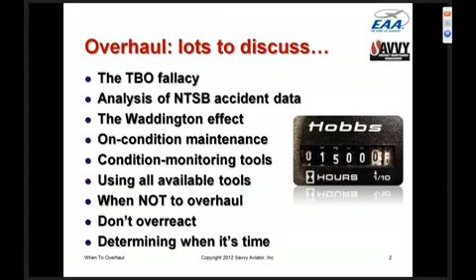Let me start off talking about the concept of TBO. As far as I'm concerned, and I'll explain why I feel this way, the whole notion of engine TBOs is a thoroughly discredited concept, one that has cost aircraft owners hundreds of millions of dollars over the years by causing perfectly healthy engines to be euthanized arbitrarily at some specific number of hours or years. I say this because all of the data suggests it's a bad idea.

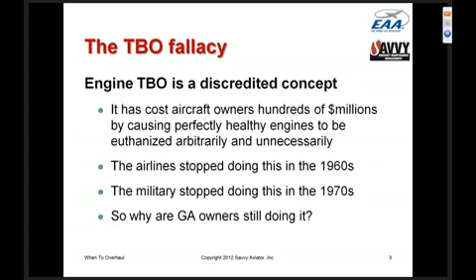The airlines stopped overhauling engines at TBO in the 1960s. The military stopped doing it in the 1970s. Pretty much the only segment of aviation that still does this is at the low end of the food chain where most of us hang out - owner-flown piston GA. And in my opinion, we shouldn't be doing it either. That's one of the reasons I do these webinars and write articles - I'd like to drag piston GA maintenance kicking and screaming into the 21st century. For the most part, presently it's sitting at about 1950. So we're going to try to do something about that.

Let me tell you why I think overhauling at TBO makes no sense. TBOs, as presently published by engine manufacturers like Continental and Lycoming, are based on time in service - in terms of engine hours and also calendar years. The problem is, time in service is not what determines engine longevity. It has very little to do with it.

I have about an hour and 15-minute presentation that I give at AirVenture, called 'To TBO and Beyond.' It goes into a lot of detail about exactly what determines how long our engines last. There are a number of factors, but it turns out hours and years are not among them.

The primary factors that limit the life of a piston aircraft engine are really two. The first one is corrosion. The primary reason aircraft engines don't make it to TBO is not because they wear out - we never wear these engines out. It's because they rust out.

They rust out because a lot of owner-flown aircraft are used irregularly and spend a lot of time sitting. If they sit in a high corrosive environment - like where my airplane is based in Santa Maria, 8 miles from the Pacific Ocean - and the protective oil film gets a chance to strip off critical ferrous metal parts like cams, those things will start to rust. We lose a lot of engines that way. That's probably the primary life-limiting factor in piston general aviation engines.

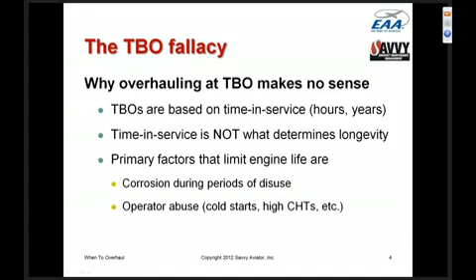The second thing that limits engine life is various forms of operator abuse, things like cold starts without a proper preheat, failing to observe proper cylinder head temperature limits—I've gone into that in great detail in the leaning webinar I did not too long ago—and so on. But those are the things that primarily determine the useful life of our engines, not some arbitrary number of hours or years.

One of the big problems with manufacturers' specified TBOs is that they're one-size-fits-all numbers. Does it make any sense to use the same TBO for an airplane tied down outdoors in Tampa, Florida, probably the highest corrosion risk environment in the US, as one hangared in Tucson, Arizona, where engines can sit for decades without corroding? That's why they put the boneyards there. Does it make sense to use the same TBO for an airplane that flies 400 hours a year on long trips as one that flies 40 hours a year, mostly VFR weekend days for $100 hamburgers? It doesn't make any sense.

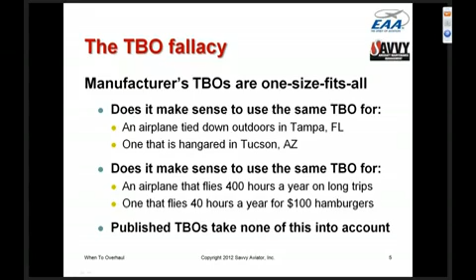The way the airplane is used and the risks to which it's exposed, both operational and environmental, have a gigantic impact on the useful life of the engine. And yet published TBOs take none of that into account.

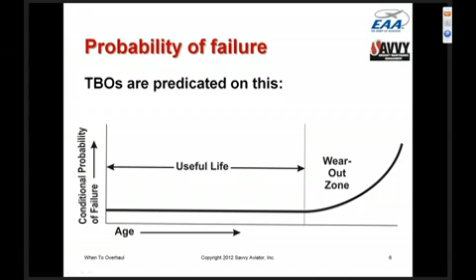So the question is, what does the shape of this curve actually look like on the left side and on the right side? Because if the engine reaches a certain age and you're concerned it may be approaching the wear-out zone, and you decide to overhaul it to avoid that, what you're doing is putting yourself right back into the infant mortality zone where the risk is high. So which is the worst threat—the left side of the curve, where infant mortality risk is high, or the right side, where wear-out risk is high?

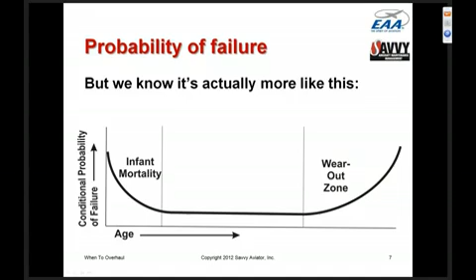Let me tell you the best data we do have. It comes from a study done in 2007 by a friend of mine named Nathan Ulrich. He's a PhD reliability engineer who has a passing interest in this stuff because he's also a Bonanza owner.

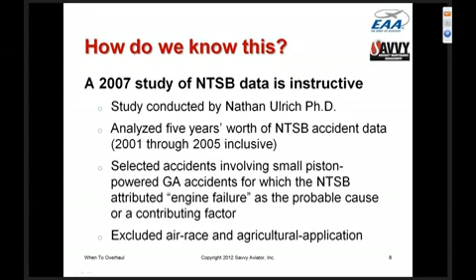Nathan, back in 2007, ran a very interesting study of NTSB accident data for a 5-year period from 2001 to 2005. He went through the NTSB database and selected all the accidents over that period involving small piston-powered general aviation airplanes where the NTSB attributed the accident to engine failure, either as the probable cause or a contributing factor. From that population, he excluded air race airplanes and agricultural application airplanes to try to get data that represents how most sane people operate their airplanes.

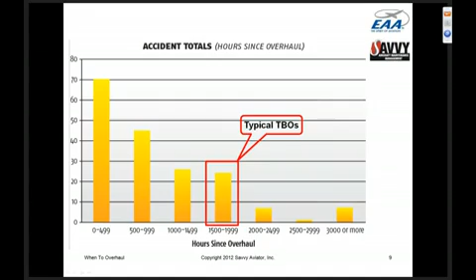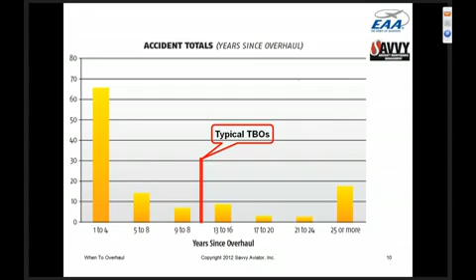So we have to be a little careful evaluating this data. We have to understand it can't tell us a whole lot about the shape of the right side of the risk curve, the wear-out zone, simply because engines are so frequently euthanized before they get there that we don't have a lot of data. This is what's called in the reliability-centered maintenance literature the Resnikoff conundrum, which basically says the data we really want is data we typically can't get, because the maintenance culture prohibits us from getting it—it doesn't allow people to operate out there.

On the other hand, this data tells us a great deal about the shape of the left side of the risk curve, the infant mortality side. I hope you find it eye-opening just how big that risk is. So if you've got an engine with some time on it and you're thinking about overhauling it, you ought to think really carefully about the fact that doing that is going to put you right into the zone where you're most likely to fall out of the sky.

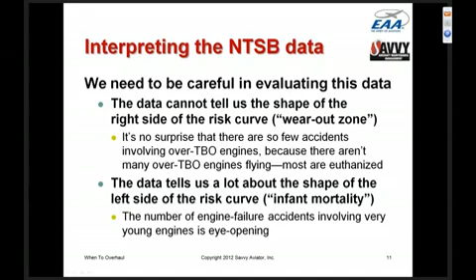Most people don't really think about that, but the data is very clear that if you're going to fall out of the sky with a catastrophic engine failure, the overwhelming likelihood is that it's going to happen with a low-time engine, not a high-time engine. What we can say with certainty is that the risk of catastrophic in-flight failure is very high when the engine is young and declines pretty rapidly as the engine gets older.

From the data that's available, and we wish we had more, there is no evidence that the wear-out zone begins anywhere near published TBOs. In fact, there's good evidence that the wear-out zone probably doesn't start until much more than published TBO, probably twice published TBO, for all but the highest risk engines. The highest risk engines are those exposed to corrosion or abuse, and those engines aren't particularly likely to even make it to TBO. But the average engine, given a chance, is very likely to go way beyond TBO without any problem whatsoever.

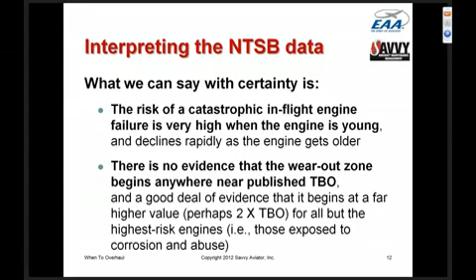It's interesting that this stuff is a special case of a general principle first documented in about 1941. I wrote an article in EAA Sport Aviation, I think it ran in 2010, called the Waddington Effect, that talked about some top secret research that went on during World War II, in which a scientist by the name of C.H. Waddington was pressed into service by the Royal Air Force.

He was brought in to start analysis on the maintenance of their B-24 Liberators that were supposed to be killing German subs. They had a fleet of these sub killers that were spending more than half their time in the shop, and they brought in scientists led by this guy Waddington to try to figure out why they were such hangar queens, why they were spending so much time in the shop, and why they weren't able to be out there killing German subs.

It was basically what we today would call a force readiness study. One of the things that Waddington's team did was gather tons of data and start crunching through it. They discovered that when they plotted the number of unscheduled maintenance problems with these airplanes as a function of how many hours it had been since the last scheduled maintenance, at that time they were putting these airplanes in the shop every 50 hours for scheduled preventive maintenance.

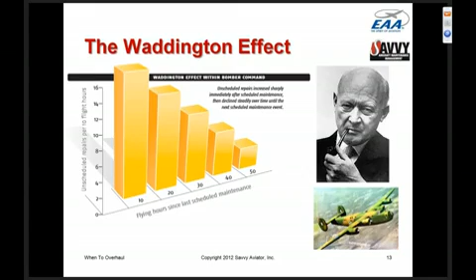In the early 60s, those principles were rediscovered at United Airlines. The United guys had no idea about the work done in the 40s because it was still classified. But they crunched a whole lot of data in the 60s, right when they were changing over from the big recips to the first jets, DC-8s in United's case, and concluded exactly the same thing: that the preventive maintenance being done to these airplanes was causing them to be unreliable. The less preventive maintenance they did, the more reliable the airplanes became.

As a result, this became the way maintenance was done in the entire air transport industry, starting in the late 60s. Most of the overhaul and replacement intervals were done away with. They don't do things with TBOs and life limits anymore, with very few exceptions. The vast majority of maintenance went from being done on a timetable to being done on condition, particularly on engines. They simply don't overhaul engines at any particular TBO anymore, they do it all on condition. The result was a dramatic, huge increase in reliability and decrease in maintenance costs.

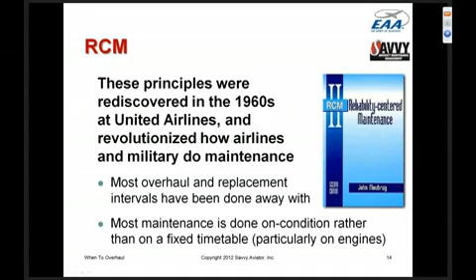Maintaining on condition is the smart and cost-effective way to do maintenance. We use a whole toolkit of available condition monitoring tools to monitor the condition of the engine, and then we let the engine tell us when it's time to do maintenance on it.

Now, the FAA regulations permit Part 91 GA operators to do that. Manufacturers' TBOs are not compulsory for Part 91 operators. We can run the engines as long as we want. But very few operators do this, and very few mechanics believe in it. They still believe in the old TBO concept that the rest of aviation gave up half a century ago. But we're still doing it.

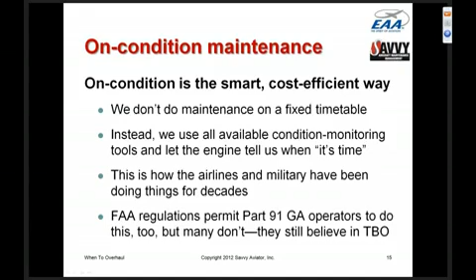One of the neat things is that we have some really fantastic tools available to determine the condition of our engines. In fact, the tools we have today are vastly more powerful than the tools we had, say, 20 or 30 years ago when I first started getting interested in maintenance. Let me run down some of the most important ones.

Oil filter visual inspection. Obviously, at every oil change, we cut open the filter and inspect it visually for metal. We'll talk a little about what we look for and how much is too much. But now we have the ability to send that filter into a lab and have them put it under a scanning electron microscope and come back and tell us exactly what the metal is, what kind of alloy it is, and what the shape and size of the particles are. From that kind of information, we can very frequently tell exactly where inside the engine that metal is coming from.

Now, scanning electron microscopy sounds pretty scary, but it really isn't. It costs about $100 to have a filter analyzed. We don't send every filter in for SEM analysis, but if we see more metal in the filter than we're comfortable with, we'll typically send it into the lab and find out exactly what that metal is. Very few shops do that, but we do that anytime we're concerned about oil filter contents.

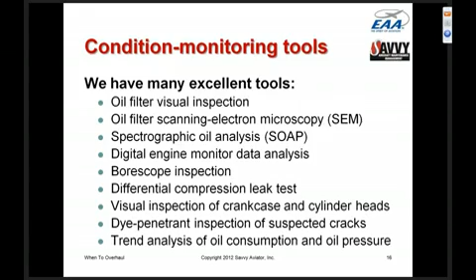Now, we have all these tools, but it's really important that we use all of them. The minute you abandon the notion of TBO and go to an on-condition maintenance program, you're basically accepting an obligation to use all of the condition monitoring tools available. And an awful lot of shops and mechanics don't do that. It's very important to put the engine on the most comprehensive condition monitoring program possible.

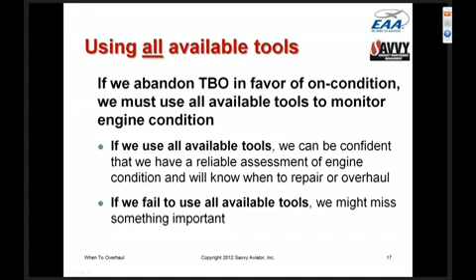If we use all of the available tools that I just talked about, we can be confident that we have a reliable assessment of engine condition, and that if anything is going wrong, we'll know about it in plenty of time. But if we fail to use all available tools, then we might miss something important.

Here are some of the limitations of some of these things and why we need to use multiple tools. Oil analysis, for example - there's a misconception that a lot of people have that oil analysis is a substitute for oil filter inspection. Nothing could be further from the truth. Oil analysis is a supplement to oil filter inspection, but definitely not a substitute for it.

And that's because oil analysis is something that detects microscopic wear metal particles in the oil. Particles that are so small that they go right through the oil filter and aren't caught, and are so small that they're invisible to the naked eye. That's why we do oil analysis, to detect whether there are microscopic wear metal particles in the oil.

Oil filter inspection we do to see if there is big stuff floating around in the oil. Metal particles that are large enough to be caught by the filter and large enough to be seen by the human eye. Anything smaller than about 20 microns is going to pass right through the filter, and the only way we'll know about it is from oil analysis.

The stuff we typically see in the filter are particles that are on the order of 100 microns or larger, and those will never show up in oil analysis because they get caught in the filter and don't wind up in the bottle. So I've heard people say, well, I don't believe in oil analysis. I had a friend whose engine blew up because it had a spun bearing, and the oil analysis never showed anything.

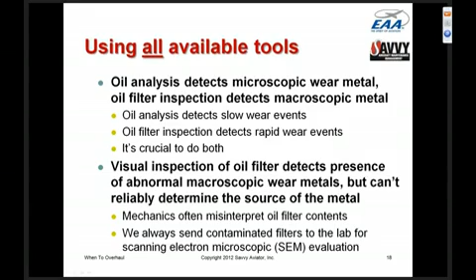But this illustrated the fact that when you look at an oil filter and see a significant amount of metal, you have to send it to the lab to find out what kind of metal it is. Otherwise, you're operating blind. In my experience, very, very few shops will send an oil filter out for laboratory analysis, but it's a very powerful tool and something we always want to do. Anytime we see an amount of metal in the filter that is of concern, we always send the filter out for laboratory analysis under a scanning electron microscope.

Talk a little bit about compression tests. The compression test, which is a very old test, is written right into the regs so we have to do it at every annual inspection, but it's a highly unreliable measure of cylinder condition. It was the best we had decades ago. Nowadays, we have much better tools, and the compression test, although required by regulation, is somewhat deprecated.

There have been thousands and thousands of cylinders pulled unnecessarily based purely on compression readings. And the compression test has so many false positives that it has cost aircraft owners a huge amount of money pulling cylinders that didn't need to be pulled.

The borescope, which Continental has required for the last 8 years, is a much better method of determining cylinder condition. I consider it the gold standard. If a cylinder has low compression, we always do a borescope inspection of that cylinder. In fact, on our airplanes, we always do a borescope inspection irrespective of compression.

And if the cylinder has low compression below the rejection threshold, but it looks okay under the borescope - in other words, there's no obvious reason for the low compression - if it's a Continental engine, Continental's Service Bulletin SB03-3, which is probably the best thing that's ever been written on this subject, says don't pull the cylinder. Go fly the airplane for at least 45 minutes and then recheck the compression.

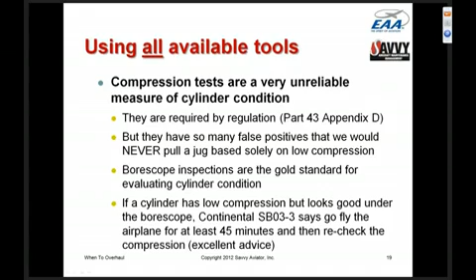Okay, let's talk for a minute about when not to overhaul, and then we'll get into when to overhaul. We never ever want to overhaul an engine because of anything that involves cylinders. You need to understand that cylinders are bolt-on accessories. They're like alternators, they're like magnetos - you remove a couple of nuts, and they come off.

If somebody told you that your magneto was defective and so you needed a major overhaul of the engine, that wouldn't pass the laugh test. But it's amazing how many engines go in for major overhaul because, let's say, they're burning too much oil, or the compressions are soft or something. That's nuts.

Cylinders are bolt-on accessories. If there's a problem with the cylinder, we don't have to pull the engine out of the airplane, we don't have to split the case. We just unbolt the cylinder and fix it, or if it's not fixable, we put on another one.

But whatever the condition of the cylinders are, it should never have any bearing on your decision to major overhaul an engine. We major overhaul an engine because of some problem in the bottom end of the engine that can't be remedied without splitting the case, like a spun bearing, or a bad cam or something like that. We never overhaul an engine because of anything having to do with cylinders - we just fix the cylinders.

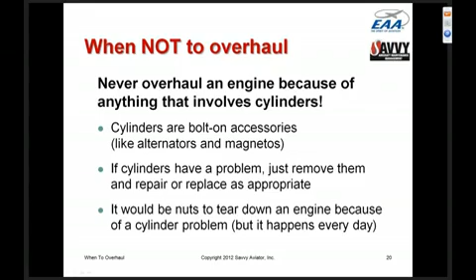But it's amazing how often owners decide to overhaul an engine because of some problem that's caused by the cylinder assemblies, even though those cylinders are easily removable.

Let me talk a little about overreaction, because we see a tremendous amount of that. Never overreact to a single bad oil report.

It takes at least 3 oil reports to establish which way the needle is moving. In other words, whether the problem in an oil report is a transient anomaly that's going to self-resolve, which they often do, or whether it's the start of a deteriorating trend that's going to require more aggressive forensic analysis and possibly some sort of invasive maintenance.

So when we get a bad oil report back on one of our airplanes, we typically just shorten the oil change interval so that we get more data faster. And then we'll wait until we get 2 or 3 oil reports so that we can determine whether this is a problem that is self-resolving, and it's amazing how often that's the case, some kind of a transient event, or whether it's a deteriorating trend.

If it's a deteriorating trend, we're still not going to tear down an engine based on an oil report, because the stuff in an oil report is telling you about microscopic particles of metal. Those microscopic particles represent no safety of flight risk whatsoever. What they're doing is giving you a heads up that something is abnormal, and it's saying it's time to pull some of these other tools into play to try to figure out exactly what it is.

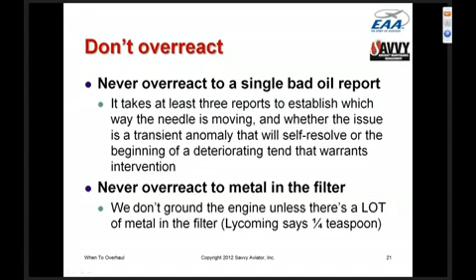We would tear down an engine if there was an unacceptably large amount of metal in the oil filter, something over 1/4 of a teaspoon, that we can't account for. And when I say that we can't account for, the example I gave you before is a perfect example.

We saw thousands of flakes of bronze in the filter. We didn't immediately tear down the engine. What we did was start to take a couple of things apart to see whether any of the stuff that was easily accessible that could be generating bronze were problematic. We pulled the rocker covers, we pulled the starter adapter, and we couldn't find a problem. At that point, we said, okay, we have to tear down the engine. And it turned out that it was a good thing that we did.

It actually turns out that not all crankcase cracks make the engine unairworthy. The manufacturers have service bulletins that explain what areas of the crankcase are critical and what are non-critical, and how long a crack in a non-critical area is allowed to be before the engine is considered unairworthy. Cracks in the critical area are normally considered unairworthy regardless of length.

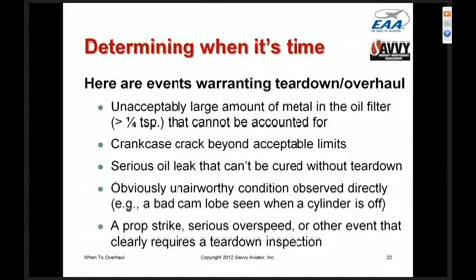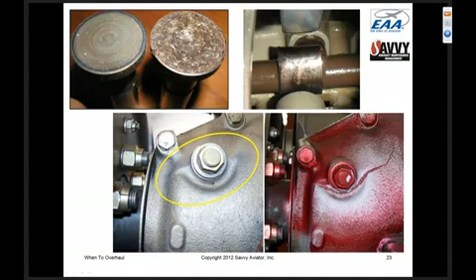Just wrapping things up, just so you know, I practice what I preach. The engine's on my airplane. It's a '79 Cessna T310R. I've owned it for the last 25 years, and both engines are now at 200% of TBO. The oil filters are metal-free. The oil analysis comes back perfect every time. The engines make full rated power. The airplane does over 200 knots with those old geriatric engines. Performance is by the book, and I have no intention of tearing them down anytime soon unless they tell me it's time.

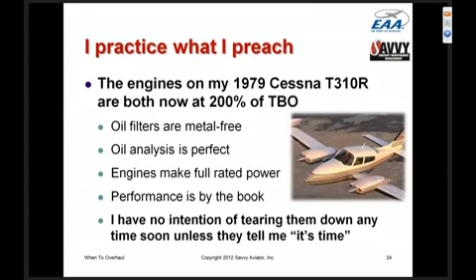On the other hand, and this is something I've not disclosed before, the oil consumption on these engines has now risen to a point where I'm getting a little bit uncomfortable. So I've decided that it's time to try to do something about it.

The oil consumption is clearly a cylinder-related issue, so in no way would it influence me to do a major overhaul on the engine. But what I need to determine is whether this is a problem that can be resolved by changing a couple of cylinders, or whether I need to bite the bullet and do a top overhaul and change them all.

Now, I should mention that 9 of the 12 cylinders on these engines are the original 1979 cylinders that went onto the airplane when it rolled out of the Cessna factory in 1979, and those 9 out of 12 cylinders have 4,700 hours on them. So they don't owe me a thing.

There are 3 of the cylinders that I've had to replace over the years, in each case because of a fatigue crack in a cylinder head from the top spark plug hole to the injector boss, which is where they normally crack. None of those cracks were safety of flight items. A crack of a cylinder in that area is basically stop-drilled at both ends and isn't going anywhere. But as soon as you detect it, the cylinder has to be rejected and replaced.

So over the last 25 years, I've changed 3 out of these 12 cylinders because of head cracks, and the other cylinders are the original '79 cylinders. They actually went through a major overhaul once, and they were in such good shape that the overhaul shop decided to put them right back on. And they now have 4,700 hours on them, so they're fully depreciated, let's say that.

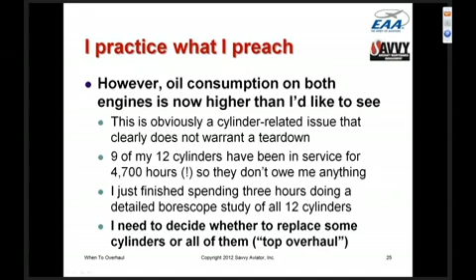So to summarize and get into the Q&A, I recommend that you ignore TBO completely as a discredited concept, and that you maintain your engine strictly on condition using all of the condition monitoring tools that we've talked about. Make sure you know how to interpret the results of those tools, or consult with somebody who does. A lot of mechanics don't really know what they're looking at through a borescope. A lot of mechanics don't really understand how to interpret oil analysis reports. Very few mechanics have a clue as to how to interpret scanning electron microscope reports on oil filter contents.

But there are plenty of us who do, and we're certainly willing to help. So just make sure that you use all the tools, and that you either understand how to interpret the results or consult with somebody who does. Don't overreact to any one bad oil report, or a little metal in the filter, or one low compression result. We want to use all these tools together to make sure that we get it right, and let the engine tell you when it's time.

And that's all I have, Charlie.